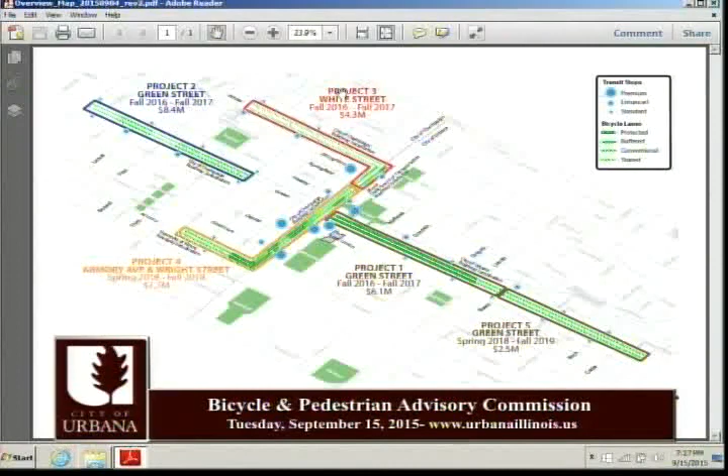And that's what Craig's doing. So the MCORE project, as you know, or if you don't know, is a really large project where we received this TIGER grant. Actually it was MTD that received it, in conjunction with the cities of Urbana, Champaign, and the University of Illinois. This is an overview of the project.

Basically the first 3 projects are going to be, actually project 1, which is in front of the Union, which is within the city of Urbana. Project 2 is over here, basically on Green near Neil, all the way up to, I think it's 6th. And then project 3, which is basically the White Street corridor up here. Projects 4 and 5, which is particularly in Urbana, is the eastern portion of the Green Street section, would actually go several years from now. So this thing's a staggered type project.

Next year, I mean they're looking at basically going out to bid in June of 2016, and this will be a very aggressive type project through the campus zone at that time, a multi-year project. You can see there's a lot of money, a lot of expenditures, and it is a good chance to get things right here and really overall improve transit operations, improve bicycle operations, and pedestrian operations through this zone. Keep in mind, we're within the university district, and in all reality, vehicles are last in the hierarchy.

So this is just the general overview, but I'm going to walk you through the exhibits, starting with Project 1, then we'll go to 2, 3, 4, and then we'll come to 5. Well, 1 and 5 are the ones that are within Urbana, but I wanted to give you a little bit of an overview of all of the projects.

So within Project 1, here, this is an exhibit that the consultants prepared. It's an overview of the highlights that are going to happen within this project. And I'll zoom in and we'll kind of walk the corridor. This is Wright Street, alma mater's over here on the corner. Over on the right side, this is Goodwin Avenue. Project 1 continues on to the east, just east of Lincoln, to Busey.

You can see within this zone, this will be a complete reconstruction of the pavement system. They'll be putting in dedicated bus stop lanes, those are what you see in red there. We'll zoom in a little bit on those.

Those lanes will likely be a colored concrete to stand out from the rest. There will be a reduction in the number of lanes through the section. Right now it's a 4-lane section with a median in the middle. It'll turn into basically one lane each direction with left turn lanes at select locations.

There'll be some highlighted things like boarding islands or refuge islands, and bike boxes, which we'll get into in a bit. There'll be a leading bicycle interval, which is basically an advanced signal time, at Goodwin and Green.

Right now at Wright and Green, they're investigating. They will have the leading bike interval, I'm told, and they're looking at the potentiality of bike boxes there. That intersection does have a pedestrian scramble, and they're going to keep it. When we go to Goodwin and Green, they're looking at bike boxes on all four approaches, a leading bike interval, and the pedestrian scramble, so they'll keep that there too.

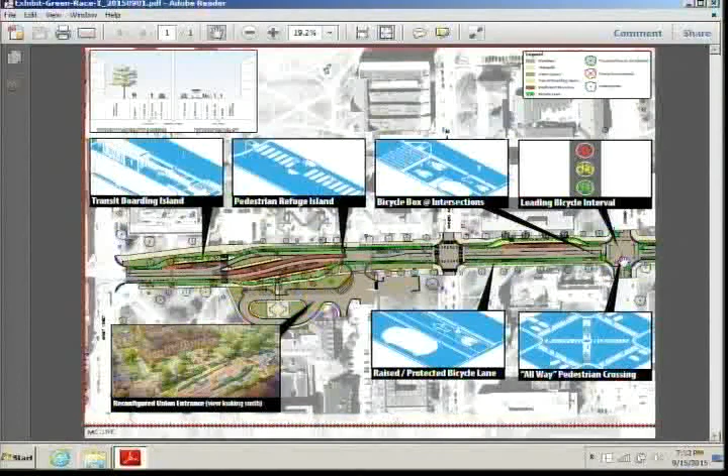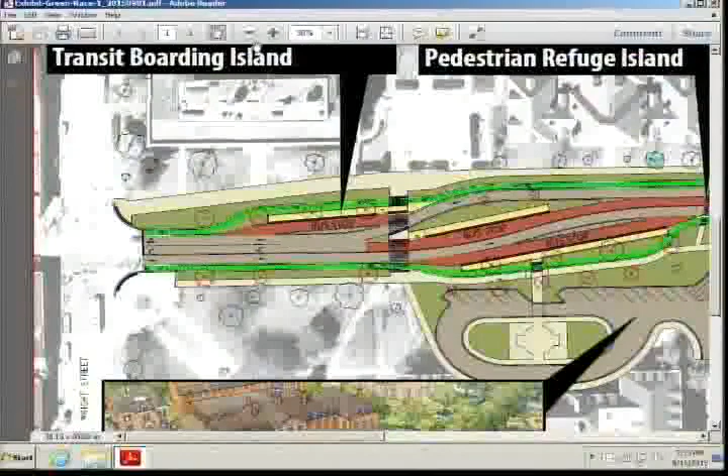But let's just zoom in, we'll go through a little bit more detail, that way we can walk through the PDF here, west to east, so you can see a little bit more. The red X's are trees that are basically being removed through the project to make improvements.

There will be a swale drainage system on the outside that we're looking at possibilities of bioswales for green infrastructure. We're not sure yet, cost-wise, if they'll be able to do that, or at least get the framework in for future beautification through there, and obviously green infrastructure.

I do know that Wright and Green, they're really looking at that heavily right now. There's still a lot out there. Wright and Green is not an Urbana intersection, it's actually Champaign's intersection to maintain. So our improvements actually start on the east leg here.

But as you see here, they've separated out the bus movements, and our city staff tell me this is really important for the operation of the transit system. So what you see here is, if a bus was going to go northbound, they would stay in that right lane, go over and unload and discharge and pick up passengers here. And if they're going to go southbound, they would come over to this lane and in, then head south. Currently what happens is they unload and load at this location, and then there's a big weave that occurs on this leg, which is really not a preferred movement to occur here.

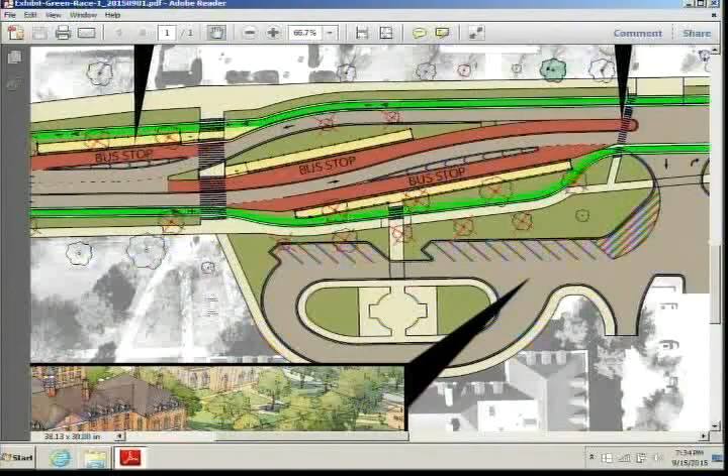I have some more zoomed in images of the Union. Basically, in the end, they're looking at closing the west leg of the Union and doing a loop drive that will enhance pedestrian crossing safety, going from the quad over to the engineering quad. I have a more detailed drawing we can zoom in on.

Walking it to the east, keep in mind this is within what they call a phase 1 study, so this is the concept study. Once this is approved, after the public meeting and input is taken and adjustments are made, the city signs off on it, then IDOT, the Illinois Department of Transportation, signs off, and then the Federal Highway Administration signs off. After that, they get heavy into the details of plan construction. They're already working on that simultaneously. Approval was given to do that, but I wanted to let you know this is really a fast track project.

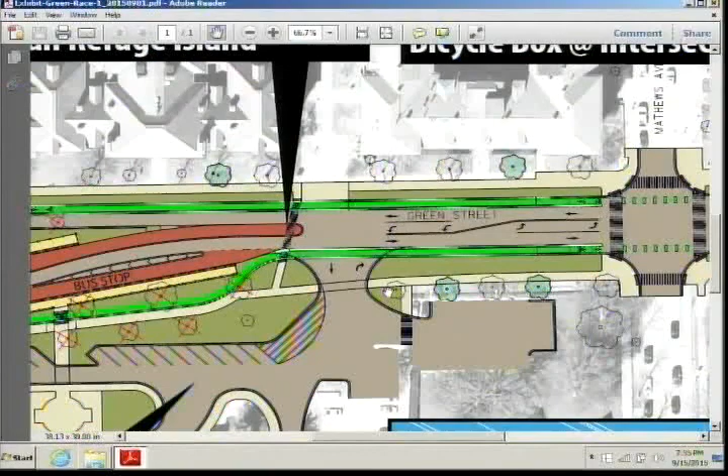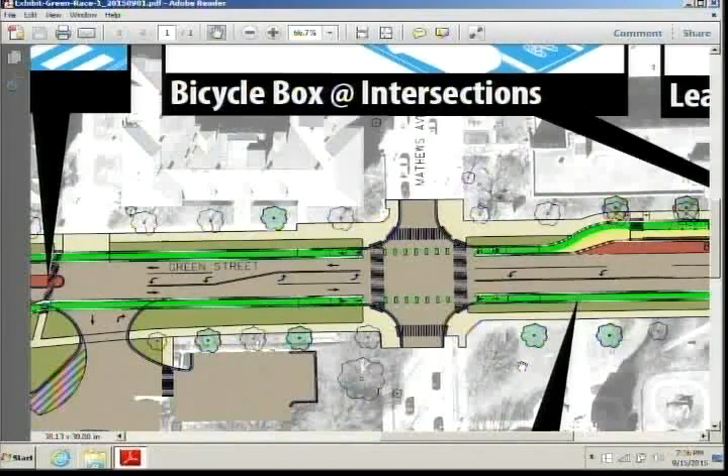As we go down here, this is Mathews. One of the things you'll see is the crosswalks, and they're showing a different type of improvement here with some different striping through here. That's unique to our area, and I think they're just wanting to differentiate where the bicycles are and where the pedestrians are.

There would be a bus stop in between Mathews and Goodwin on the north side. You're seeing that here. This is the bike boxes, which we'll get into a little bit further along.

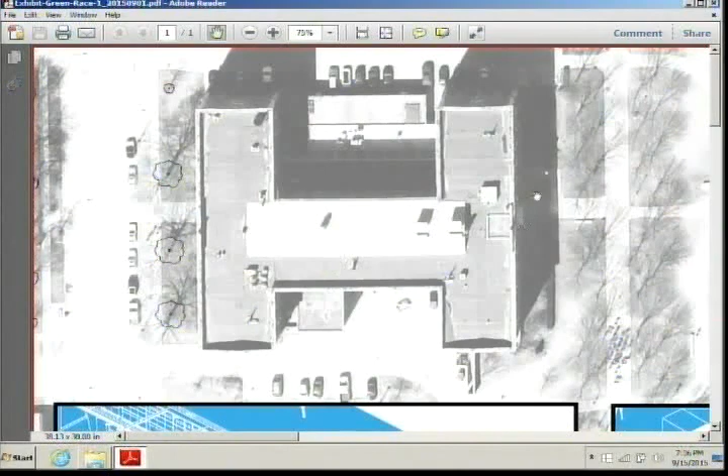I'm going to zoom out just real quick, and we're going to walk through each little thing here. Let's see if it pulls up. So this is a typical section.

Basically what you see here is the raised bike lane. There's a mountable curb, and the bike lane sits up higher than that. This planting strip is what I was talking about - it's actually a drainage strip, and then the sidewalk. What's important is the bikes are now being separated. That cycle track out there now will be eliminated, and the bikes are separated from the pedestrians.

On a side note, I went to school here. My wife followed me later when we moved back up here. I told her, you better be careful about what we called being schwinned. First day she got schwinned and got knocked down. I think the reason I'm letting you know that is it is dangerous when you have the mix of bicyclists and pedestrians in that same zone.

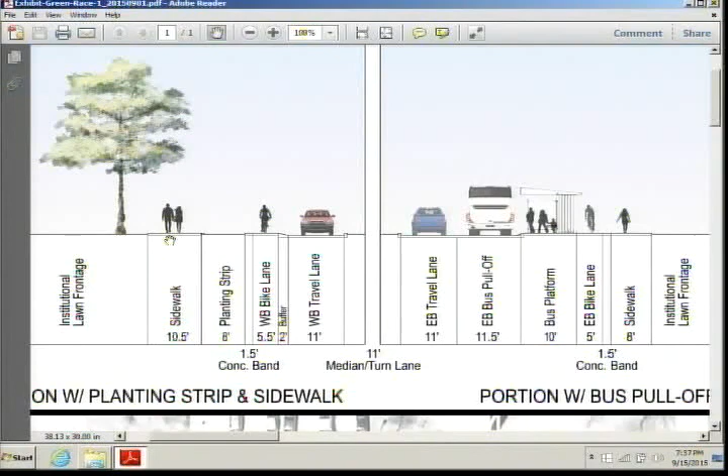That's what they're able to accomplish here, a separation of those two entities. The bike lane is shown at 5.5 feet, but there's actually a 1.5 foot concrete band, so that gives you a 7-foot bike lane in the end, the effective width I guess. And then they've got 11-foot travel lanes through here.

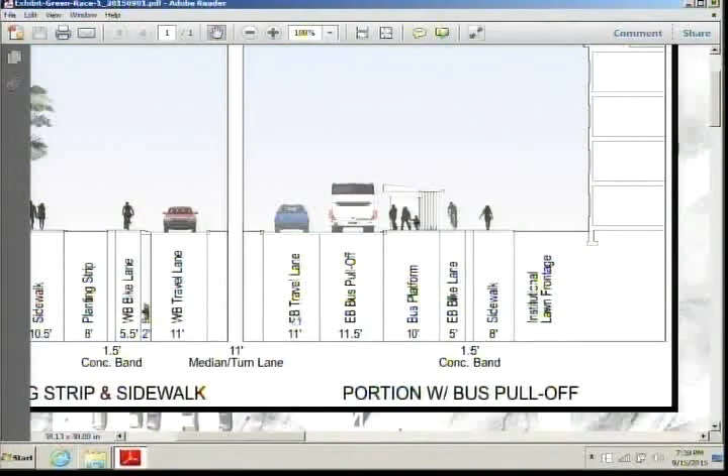Let me zoom out a little bit, and bear with me, I'm coming down with a cold. Barb's working me too hard.

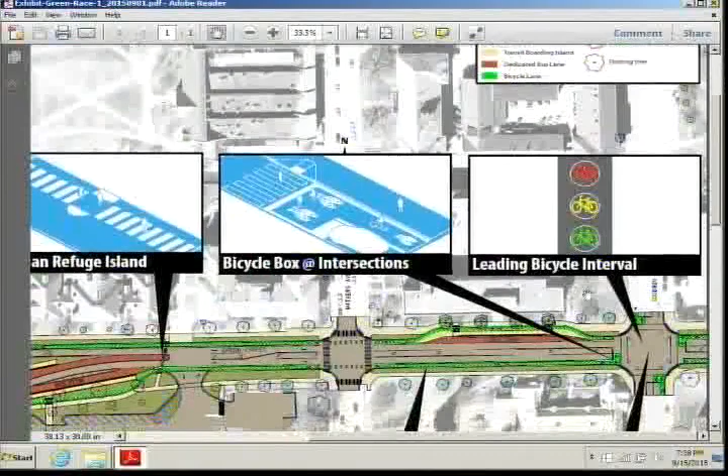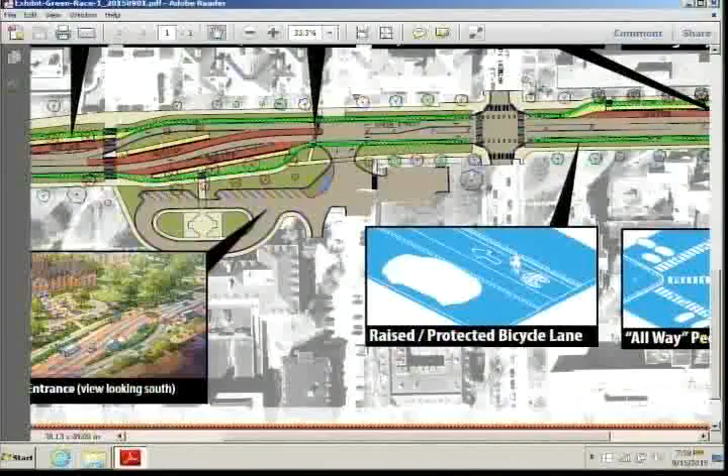So again, here's the bike boxes, and we'll get into that - I've got an interesting video I'll show you. This is the leading bicycle interval; I have something on that too, we'll get into that a little bit more. You've seen the pedestrian scramble and the protected bike lane, and I have a more detailed drawing of this we can zoom in on.

Does anybody have any questions with this zone from Wright to Goodwin? Any questions on this?

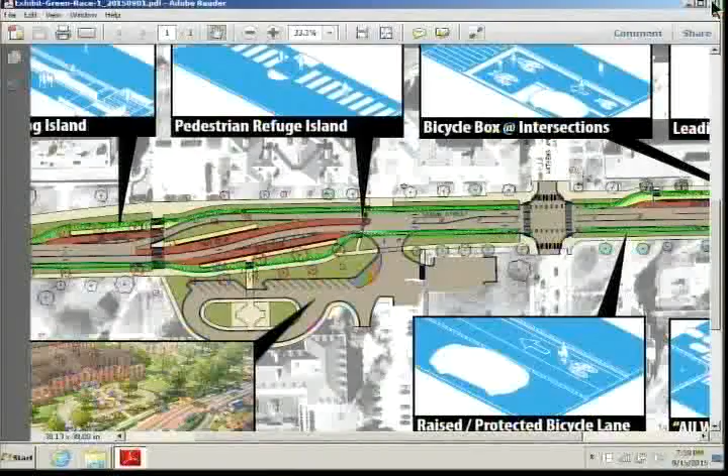Cynthia asked: are they going to have a proposed design for Wright and Green for this meeting, or are they still working on that? They're working to refine it as we speak. I'm anticipating they would have something. I expressed a good deal of concern about the design shown here, because I am quite convinced that cyclists would come off the raised bike lane and zip across 2 lanes into the left turn lane, which would be extremely hazardous. Yeah, there's talk of a 2-stage left turn here, or a bike box. In all honesty, I haven't seen the details on that.

As the person who worked on these grant applications, one of my primary motivations was to redesign Wright and Green so that bicyclists know where they should be and how they should behave. Right now they don't know whether to behave as a motor vehicle or a pedestrian, and you never know what they're going to do. That's very hazardous for all the vehicles, but buses in particular have a difficult time here because cyclist behavior is erratic.

I definitely want there to be clear definition for them, and that was why I spoke up initially when looking at this with MTD. So I did squawk about that. I didn't make any recommendations, but I did say I think it's very important that we not just bring them up to the intersection and say, okay, figure it out. Because the way it gets figured out here is people do all sorts of erratic things.

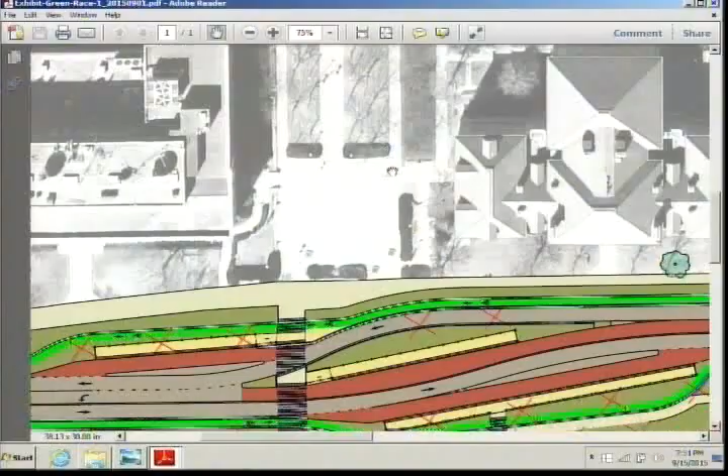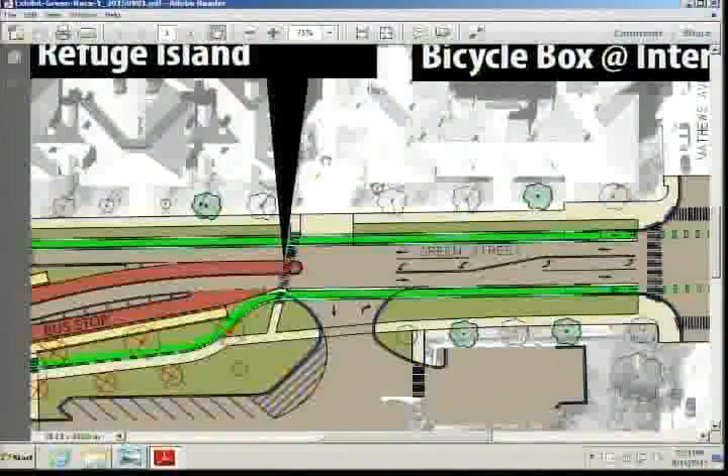So as we go east here, there's just the one entrance here, and then there's an entrance over here. And then there's the Mathews one on the north side too. Cars presumably go in and out of that, but I think this is more of a service drive than anything else. The good thing is with them eliminating this, there's no conflict here that used to be here on the west, because there was a drive here too.

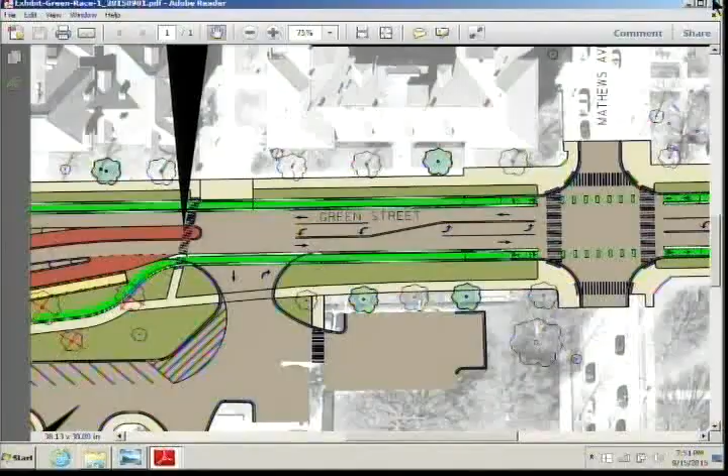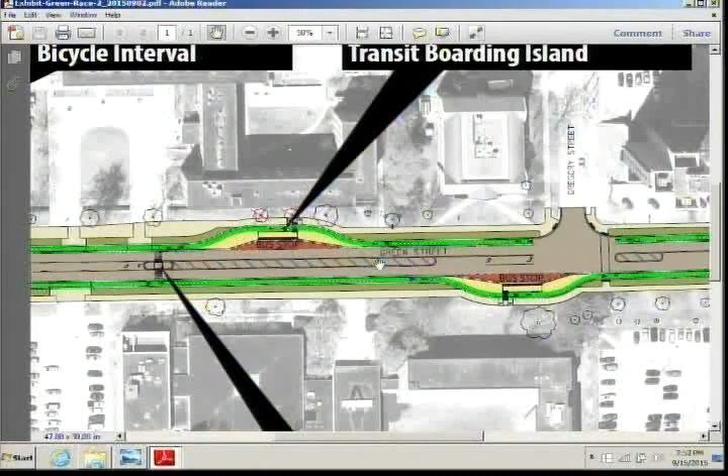So we pick back up at Goodwin Green. There would be a bus stop there just to the east, which there is not one there now. And we're still within the raised bike lanes. We see a bus stop over here and here near Gregory. We have talked about maybe this center median actually being, instead of painted, maybe some type of grassed raised median where there could be some type of plantings in there, which would help break up that visual space. Again, you see the bicycle lanes go around the bus stop.

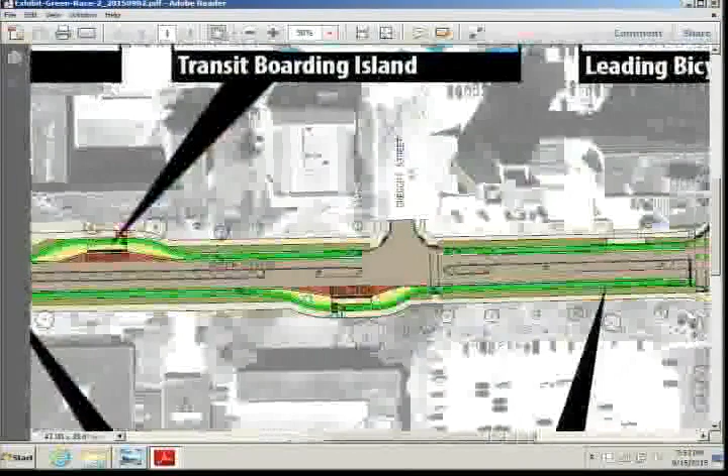And then as you get to the Lincoln intersection here, they're looking at a leading bike and leading pedestrian interval, both going concurrently, and we'll talk about that a little bit there. Could you explain that a little bit further? Not everyone may understand what that is.

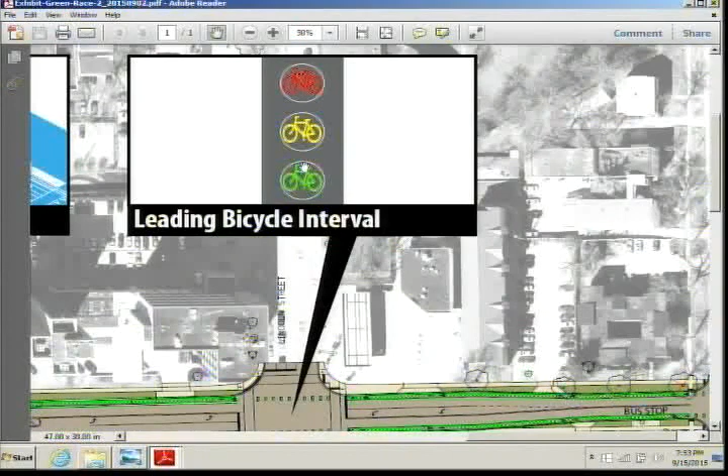So basically, you could say it's a head start interval, is what it is. It's a 3 to 5 second interval where the bicyclist would get this - there would be a special signal just to the right, and I've got a YouTube video that would give you a little bit better idea. But it would go in advance, so the bicyclists would get a head start on the vehicles, and also the pedestrians do that too. They call that, and you'll see in this video, sometimes a pedestrian head start interval - 3 to 5 seconds to get them out in advance of the cars, so they don't have to immediately compete with the cars. And one of the benefits of that is it increases your visibility, because you're already halfway out into the intersection, particularly for the pedestrians.

A lot of the right hooks are a result of the pedestrians starting at the same time as the cars, and the cars are not paying attention. My own daughter was hit at Vine in Illinois for that very reason. So it really can make a big difference in reducing those right hooks for pedestrians. And I haven't seen as much data on the leading bicycle interval, but I'm assuming that the increase in visibility will have similar benefits.

And this would be for the east-west movement, not for north-south. The primary movements here are east-west with the pedestrians and the bicycles. When we get east of Lincoln down to Busey, and Project 1 ends right at Busey, this would just be your traditional bike lanes. Keep in mind they're showing them green - that's just for visibility here. Our intent is not to paint them green at this location. If they do bike boxes, they will likely be green.

About that bus stop there at Busey and Green - is that a traditional one, not one of these enhanced bus stops? That's a traditional bus stop where the bus would pull into that rightmost lane to let passengers off, so they'd interact with the bicycle lane. There's just not physical space to create a bus pull-off without getting into the right of way.

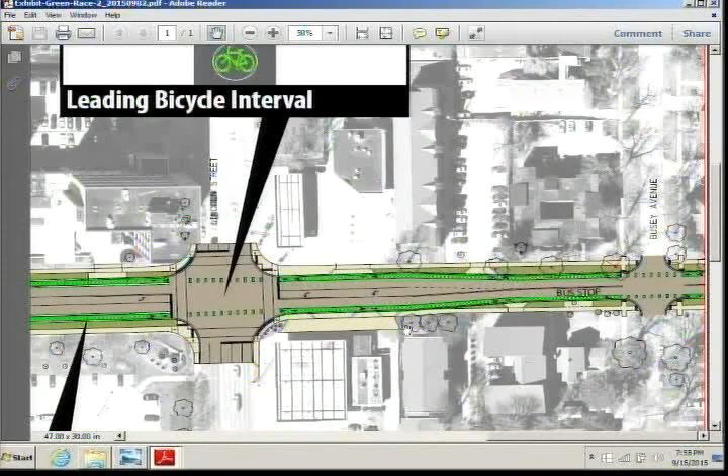And now we're into the residential area - the start of it. It was very important for Urbana to maintain the character of the corridor through that zone. We'll talk about that within Project 5.

Let me zoom out a little bit so you can see. We'll get into the bike boxes here, they call it LBI. Just looking through here, I think you've seen all of this. So any other questions? That is in essence Project 1.

One thing real quick - the unimproved bus stop that's going to cross the bike lane, is there anything special going to be done to reinforce the road there? We've talked about that - that section would be rebuilt in its entirety.

We are talking that the section between Goodwin and Lincoln would probably be rehabilitated, but the section east from Lincoln, at least Busey on down to Race, would be completely reconstructed. And when we do that, if we use an asphalt pavement, we would put in a concrete pad for the buses.

We've been doing that a lot around town, because there's been different spots, in particular Wright and Gregory - there's a pothole this big because of the buses. So I just wondered. Thank you. Any other questions about this segment before Craig moves us forward?

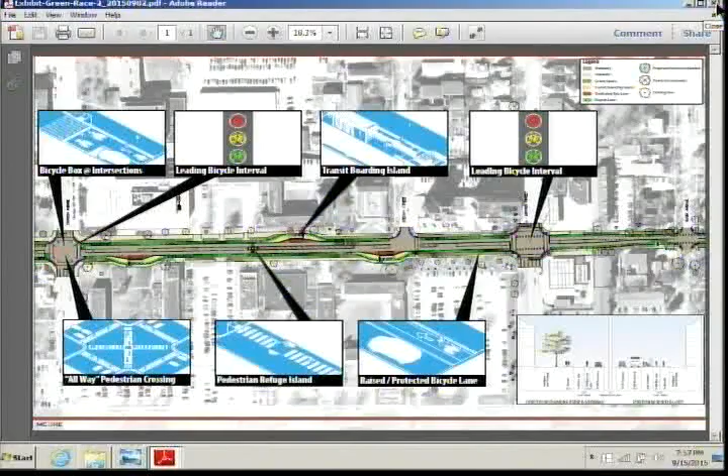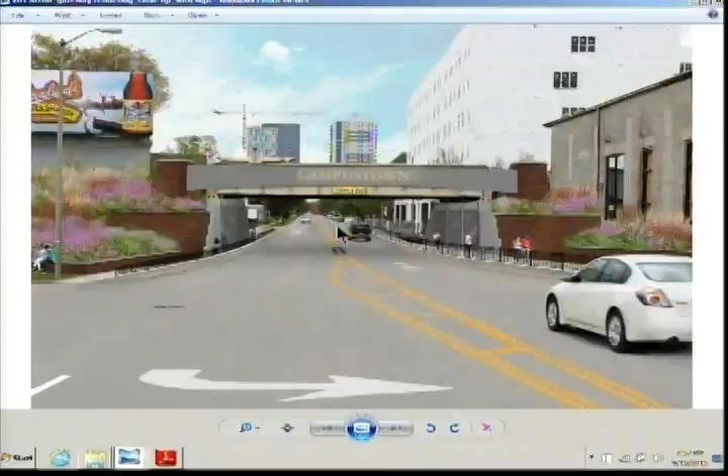So I just want to show you the projects in Champaign and the other section of the U of I, just so you get a handle on this. I haven't spent much time on this myself. This would be the entrance off of Neil - I'll be discovering it a little bit with you since I just downloaded this stuff. This would be the gateway entrance right there at Neil, kind of a concept drawing, so some type of beautification there.

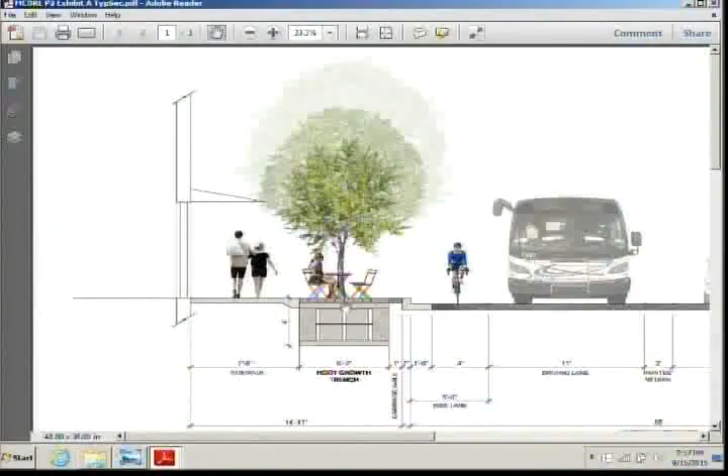Just zooming in here, it looks like they'll have some streetscaping, a sidewalk. This is really a corridor that I'm understanding from Champaign they're looking at redevelopment wanting to occur, which is really what happened from Wright Street to the west when they redid all of that. The whole landscape's changed since I went to school there.

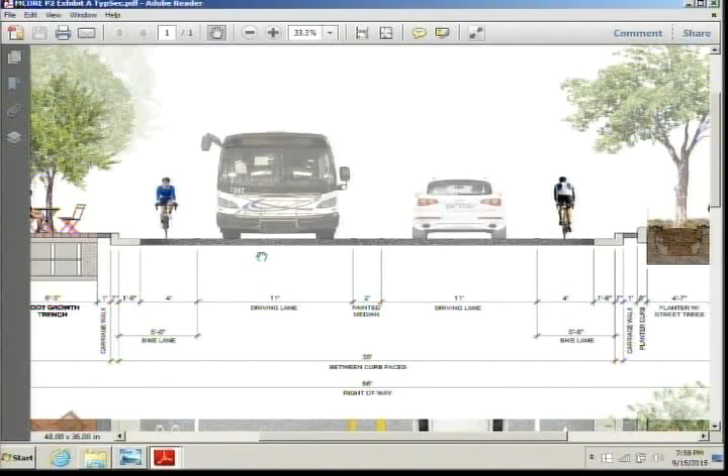So this would be a complete reconstruction, with a 4-foot bike lane counting, and if you count the gutter pan, that would be a 5.5-foot bike lane with an 11-foot driving lane, which when you have buses, that's about where you want to be. You could get down to 10.5, which we do on East Green. Then they've got a painted median it looks like, no plan view rendering, but that's kind of Project 2.

This project was set to go regardless of receiving the TIGER grant, it just fit in nicely and they were able to get that taken care of. Since this one's Champaign jurisdiction, if people have comments on it they can come to that event later this week - this will be fair game to really talk to the Champaign folks about.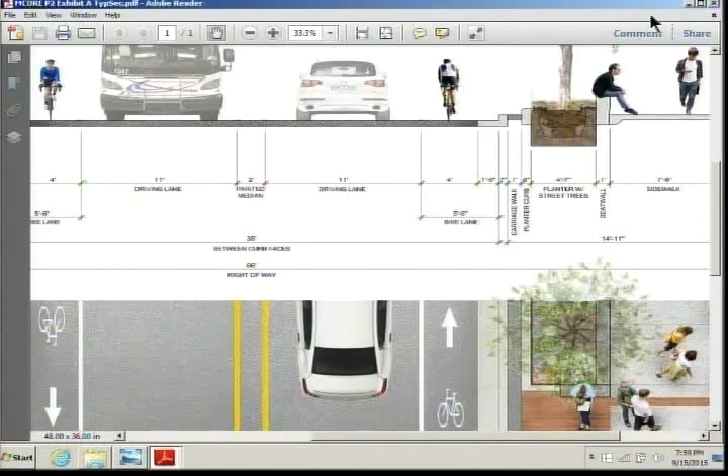So any other questions on this one, or do you want me to zoom out or look at anything? I know wider bike lanes are often appreciated by the bike community - if we can get them to 6 feet or whatever, that'd be great. This section's pavement is in really bad shape too. Any questions about segment 2 here?

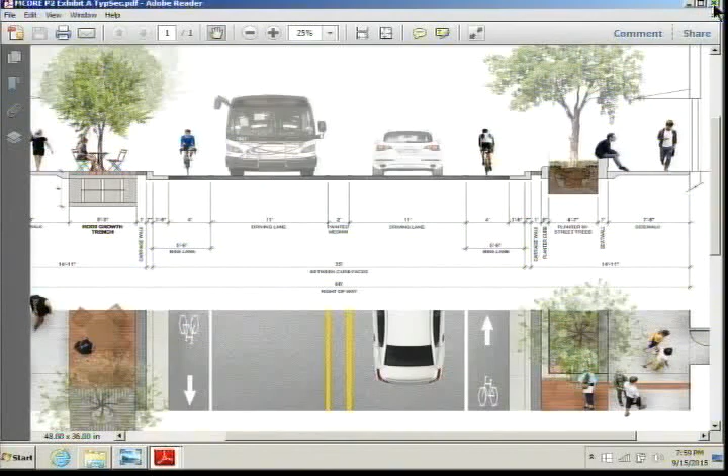So this is Project 3. Let's see here what we got. Some of these are large files, we'll have to wait a second.

So this project 2 and 3 would be done, started next year. Let's see if I can open it up.

So this would start on White Street, which is really where they redid the boneyard here. Let's let it catch up a little bit. So it looks like they're actually doing shared, I guess they call it. This must be a pretty big file.

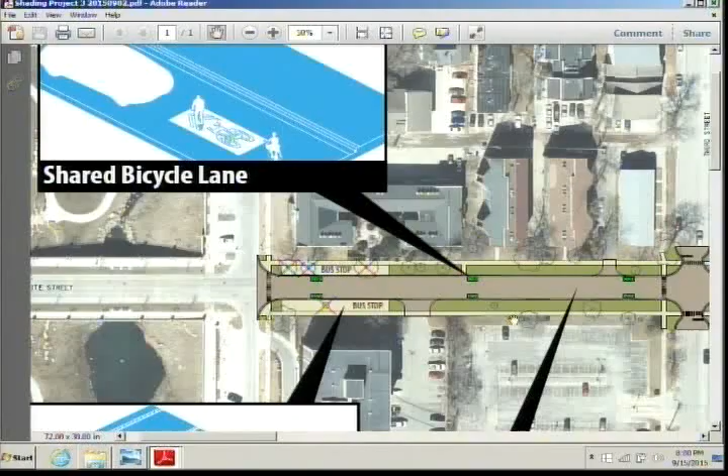I can tell you the reason the road was not expanded here was because they would have had to take out an enormous number of trees to widen the roadway for a bike lane. The traffic volumes are pretty low, so it was felt that sharing the road is acceptable, although a number of cyclists have told me they don't like riding with all those buses. But that's a choice people can make - it's all a balancing act, and the number of trees was really, really large.

For me, it's the condition of the pavement because of the buses. That's the huge problem, not the buses themselves. It's a brick road.

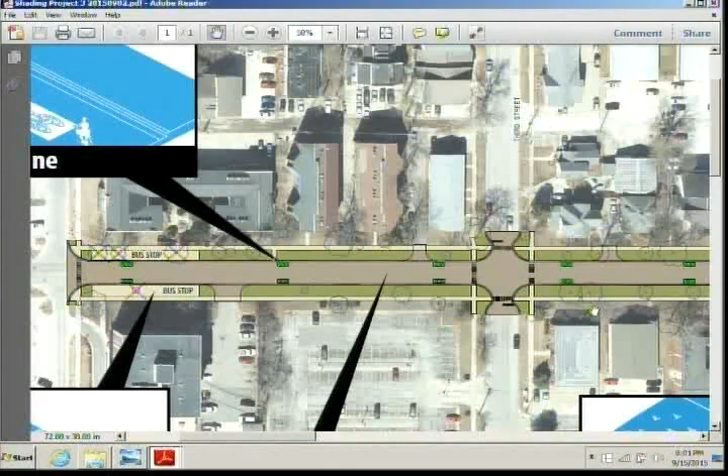So it looks like at the intersections they're doing bump outs, which would shorten the distance for pedestrians to cross safely. Here they do have some space with a parkway, which we don't have on Project 5 - not enough room to do some of that. It looks like they're doing some bus stops here. Looks like some type of transit loading platform with a kiosk. So maybe it's more like they stop in the road and then they have a platform - this may not be a pull off, but just a platform. That's my interpretation. High visibility crosswalks.

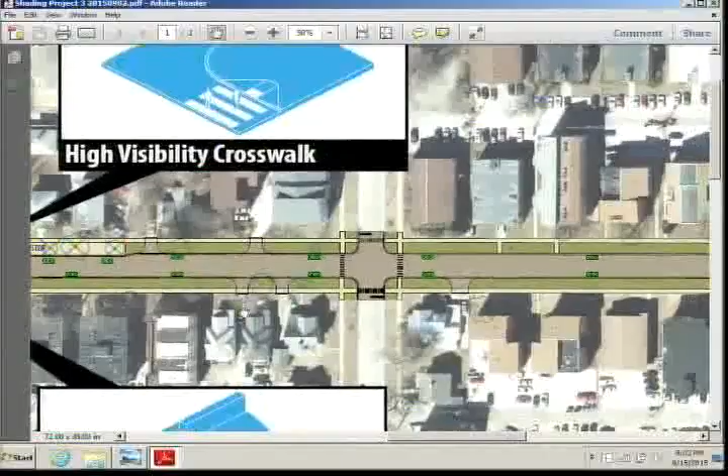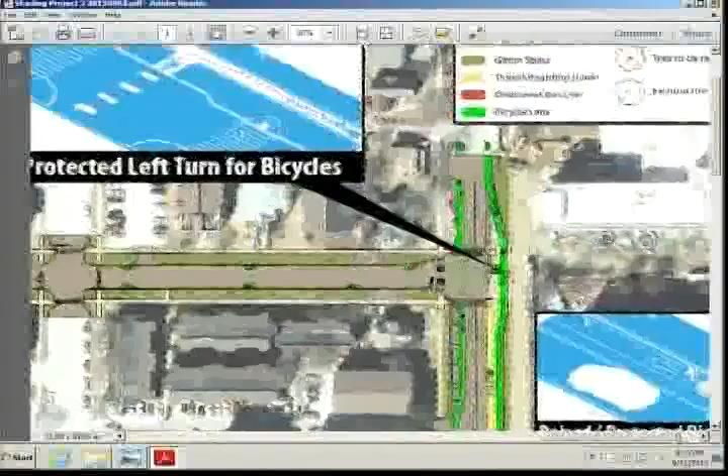Tell me to slow down if I'm going too quick. There's a protected left turn for bicyclists down here. I know this was a challenge. This is a unique design here - you've got the bicycle lane northbound going behind the bus stop. If they want to go west, they have to do this protected left turn, it looks like.

And then is there, pardon me? Do you see it there? The 6th, isn't it? Yeah. No, this would be right - oh, okay. Yes, right, that's right, Wright and White, right, where we get in. Yeah, right now it's very squirrely.

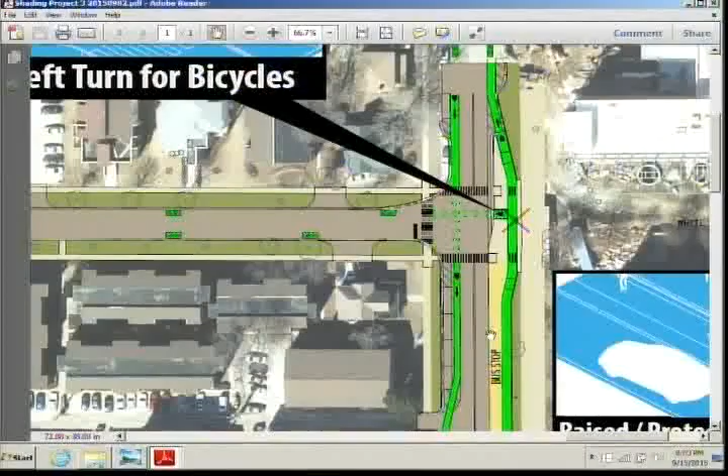One thing to note too, if you're an experienced bicyclist, you can always go over here to the left and stay in this lane, and then make that left if you wanted to do that. Again, they're trying to design for that casual adult bicyclist.

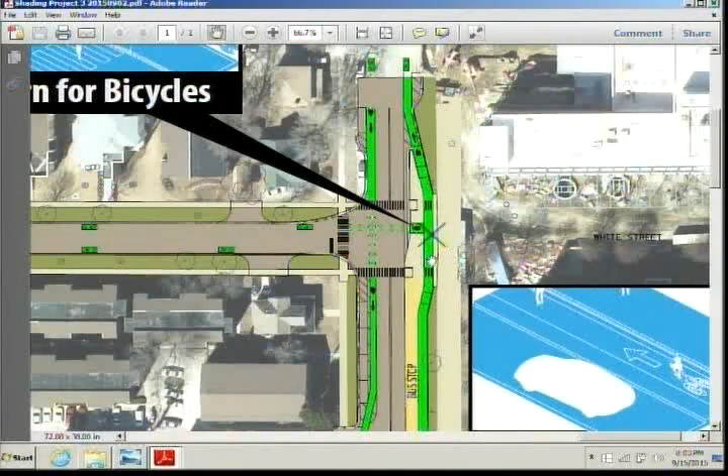Is there anything specific you think will be confusing? I had trouble getting here on time tonight because I had to navigate through the mess there. And what are they doing with the fountain there? I just have this funny feeling that when they get done, it'll be even more of a weird amalgam of pedestrian and bicycle and construction and visibility.

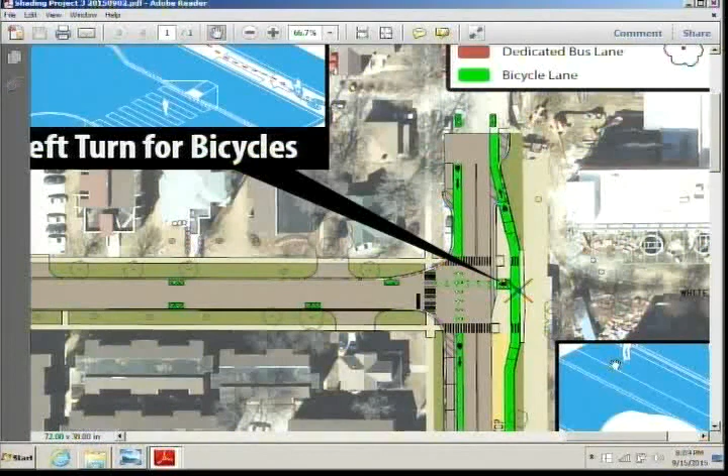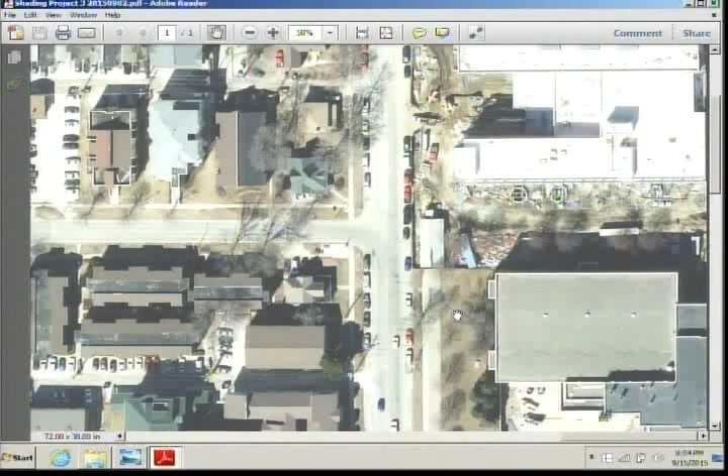This project unfortunately doesn't have jurisdiction over that, but you can ask about it at the meeting. So it sounds like things people can come to the meeting and ask about are whether that shared lane approach works, and whether it'll be marked as sharrows - there weren't even quite sharrows in the picture. They were going to put sharrows in, is my understanding, and they just don't show them here.

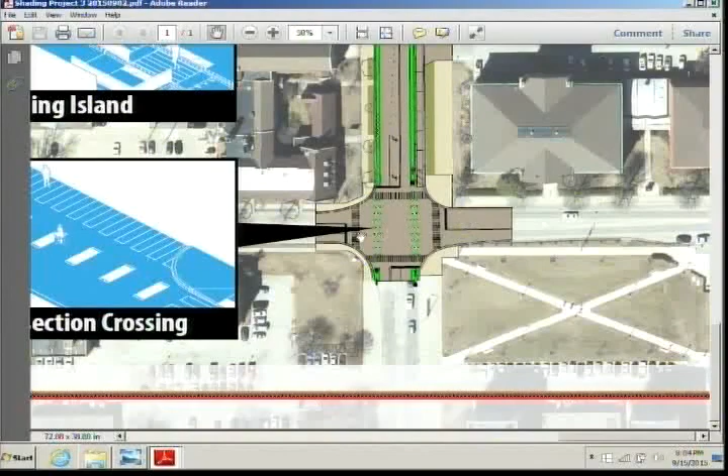So as we go to the south, now we're going down towards Green Street and the Alma Mater. So this is kind of, well, this would be Springfield right here at this point. What's your thoughts on

this bicycle intersection crossing? How do people feel about that concept of the bike lanes being marked, the bike lane route being marked through the intersection parallel to but separate from the pedestrian crosswalk?

I'll say I like it, because that was a comment I made to the planning department when they asked for our comments. I like seeing that they kept that comment in mind. I'm not sure if this would be the best way to do it, but who knows what would be the best way. My experience is from bicycling in other communities that have this - it is helpful. It helps alert the motorists that they are to be looking and where to be looking for the cyclists going through an intersection. I feel like they pay more attention when it is done that way. That has been my experience. Now, that's just anecdotal, but I think there is some evidence that it's helpful. I don't know how much research has been done on that.

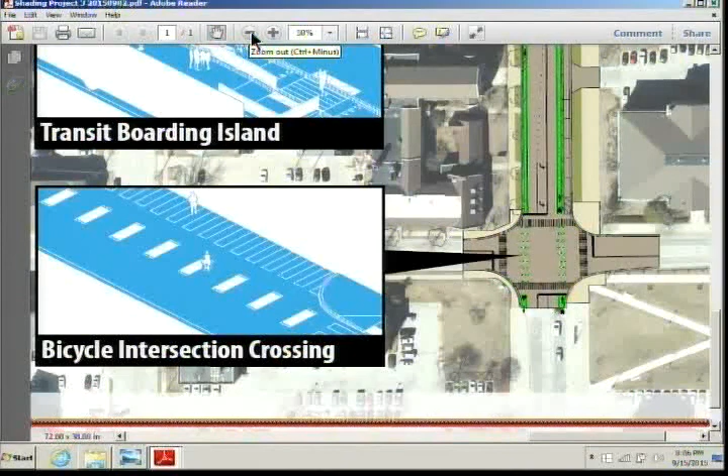I also want to say on White there will be lighting put in, so it'll really improve the lighting, and I think that'll make a big difference in safety. Everybody knows the condition of the road is a safety issue, but I think that'll be nice too.

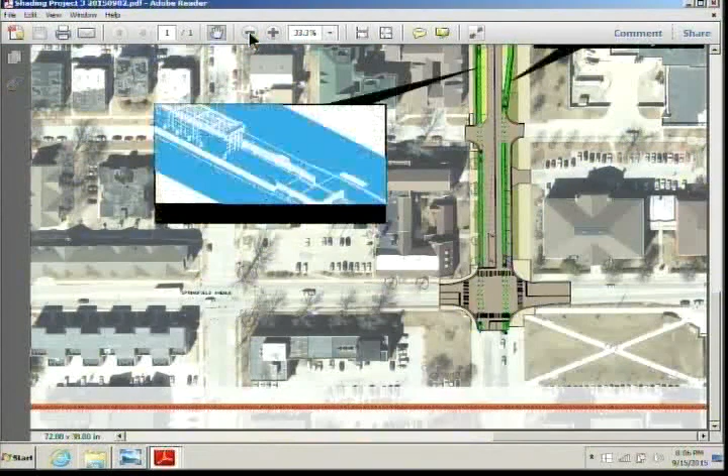So any other questions on Project 3? Are we good? Yep.

Do we need to see the cross-section, or are we good? I think we're okay. There's a theory that we just wear you down and then you just say yes. That does happen, yeah. I'm getting a cold, so I'm getting tired myself.

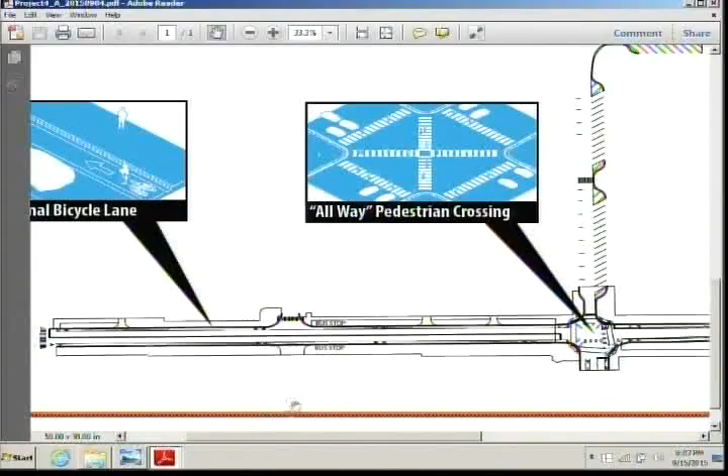So this one, at the time that I pulled this from their site, wasn't all prettied up at this point, but it looked like, so this is Armory down here, and the grad library would be back over in here. No, actually Armory would be over in here, and so it looks like bike lanes, standard bike lanes coming up. Is this 6th? I think this is 6th. Yeah, here. There is some revamp of the parking around here.

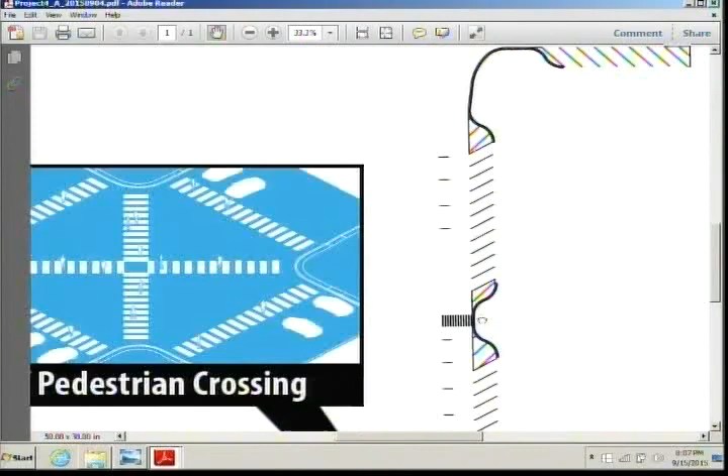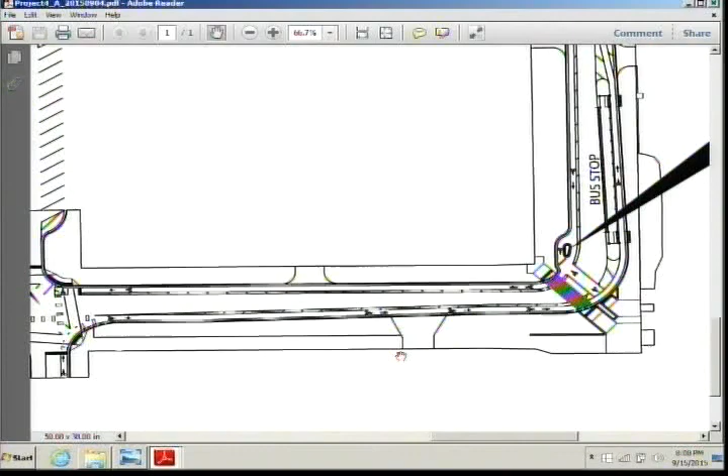So as we zoom in, right in Armory was, I know, a lot of discussion there. So you can see, bike lanes east and west, and this one was actually, I think some of the people were still involved in this. The bicycle community had a meeting, a lot of people came. I know there were some people here on the commission that were there, and I think the result here, this was a challenging intersection, and there was some talk about removing the bike lanes completely, and I think there was eventually a compromise, and so you do see the bike lanes that continue on through.

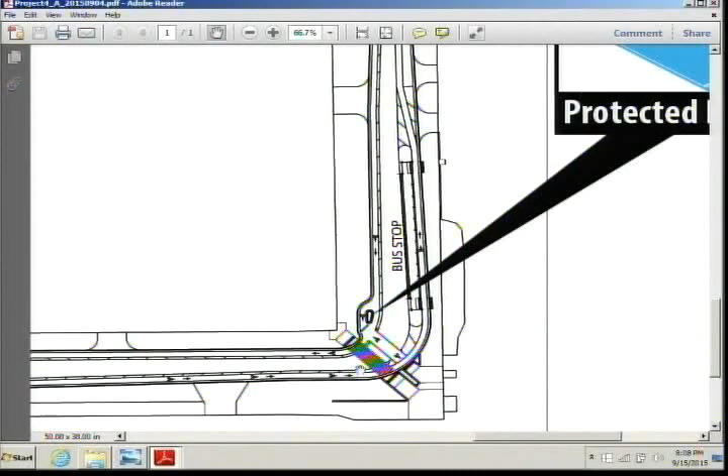Then the bus movement would actually be one-way northbound, and there'd be a loading zone here on that northeast corner. So the grad library's over in here. There's a lot of stuff going on here, a lot of pedestrians, and so crossing the bus zone, it would not stop on the south, right there. Right now, they stop right in here. Now they'll turn the corner and come over in here, or on this side.

And that's a huge platform, improvement. I ride that every day, and it is a disaster. It's horrible, it's scary. Looks like they're doing some type of, it's almost like a jug handle here, so that they don't just zip across there.

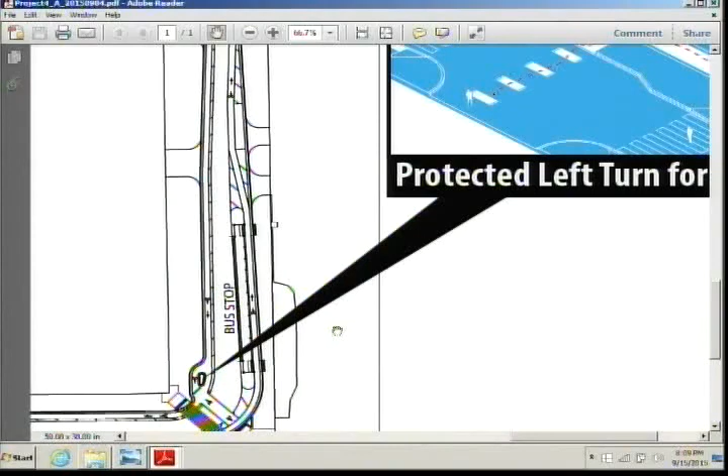It looks like the transit district is the one that had to compromise, because one of the goals was to get back to having two-way bus traffic here for a variety of reasons. We're in such constricted space because of the buildings and the historic nature of the library that there just wasn't space to do everything, and putting in the priority for pedestrian safety, this location being the first priority, there was eventually this compromise arrived at, and it is going to be a huge improvement for the pedestrian and bicyclist users in this location.

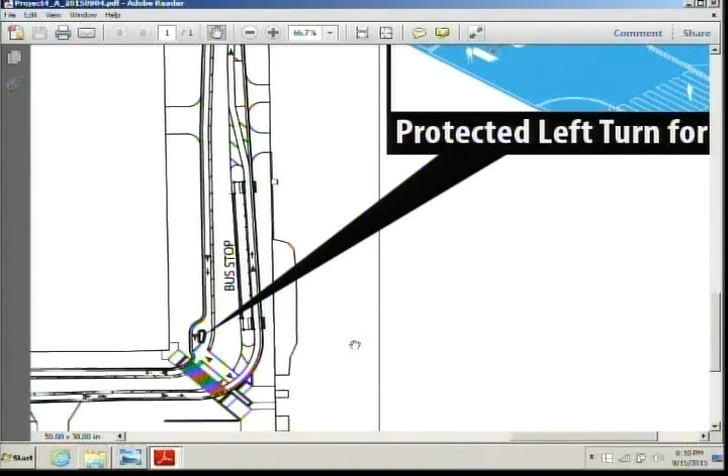Yeah, I think we should all thank the MTD, and also the bicycle community, because without that voice, it's easy for people not to understand, and I think that's the struggle we're going through with this bike box issue right now, too. So as we head north here, you can see that they'll still maintain that bus-only lane, where then cars would still go to the west.

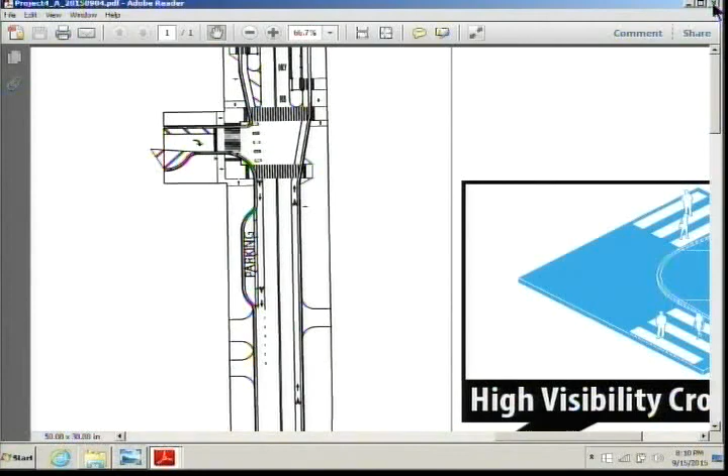Any other questions here on this section? No? All right, so let's see. So this would be the next section of that.

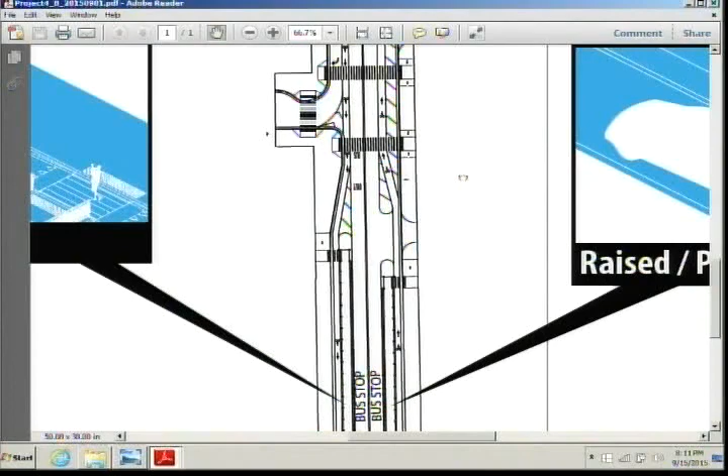So now we're really into a bus-only zone through here, so no cars at all. And the bike lanes basically are routed behind those bus platforms, with fencing and marked crosswalks, so that you don't get someone stepping off the bus, or the bicyclists have people stepping in front of you without any warning.

So you see here, cars would come down, and this would be a case in point where they are able to get the space in to make that right turn lane, and then have the bicycles go through.

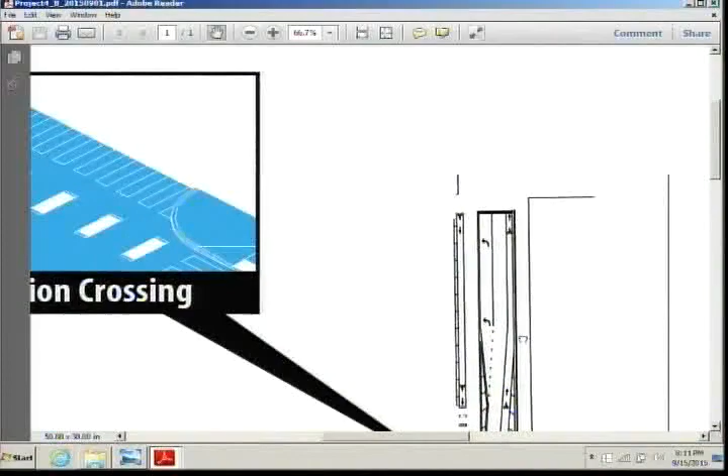Wow, that's a big change, but it seems like much improved from the horrible sort of substandard two-way cycle track, whatever you call it, that's there now. Years of debate, and this is a big improvement. Any other questions here about this segment?

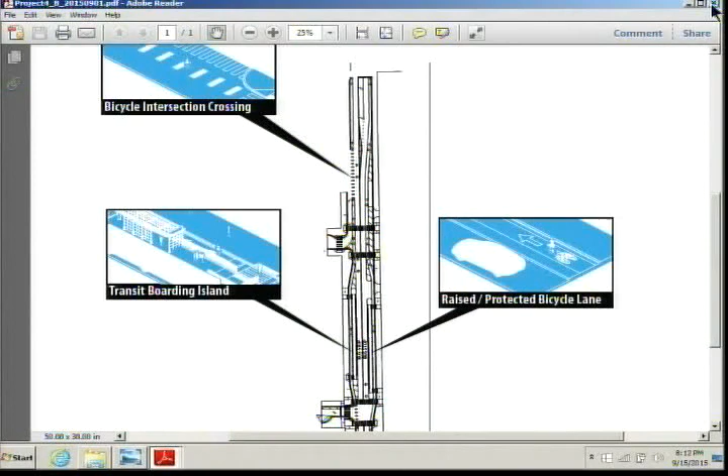Okay, let's go to project 5. So now we're back to Urbana. This would be 2018 construction starting at Busey and heading east to Race. This is probably the most straightforward project of them all. The curb and gutter limits do not change, so the road does not get wider.

But there would be parking that we're going to seek to have removed along the north side of the road, all the way through the project. I think I spoke about that last time.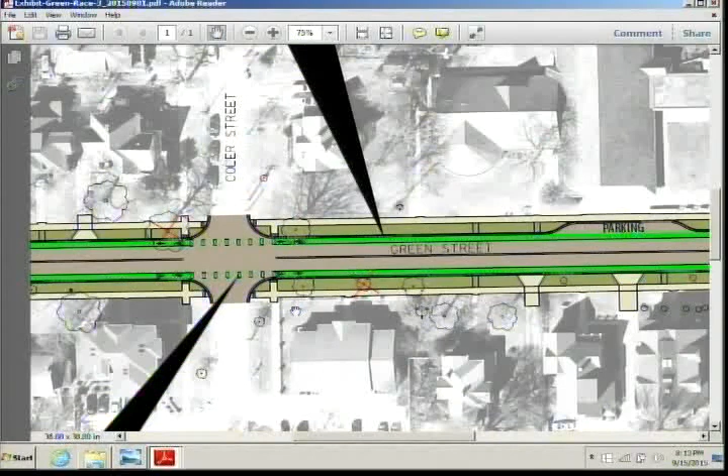We're actually investigating, one of the things we're going to look at is some trees. There's a lot of trees, I've walked it with the arborist, but there are declining trees. There's a few ash trees that are going to come out. But there are some specimen trees that are really nice, and we may approach property owners to seek permanent easements to run the sidewalk around and onto their property to save the trees if we can.

I think it's important to maintain that look and feel along this residential corridor. This is the Presbyterian church. There would be a pull off here that we're looking at because they had some concerns about the loss of loading and unloading, particularly for their senior parishioners.

Same thing down to the east at the Unitarian Church. So you do see bus stops, like I know this is a heavy bus stop here at Orchard. There's quite a bit of use. So again, the bus would pull off into the bike lane, but there would be a pad.

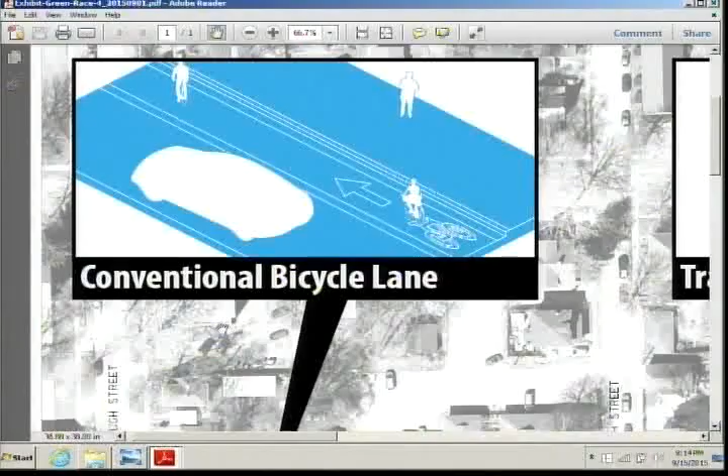And then McCullough's there, I'm going to go ahead and start from McCullough over. This road, we had anticipated reconstructing in the 5-year plan, but with the MCORE project we were able to move it up forward. And the pavement is not in good shape through here.

So as you see, it's really fairly straightforward. Here's the Unitarian Church with a pull off in there. Now we're getting closer to downtown Urbana.

With the library being over on this corner, there would still be a raised median here. This is a case in point where they'd be using a design similar to our other designs in town, where we'd have a shared right turn lane at this location due to the lack of space.

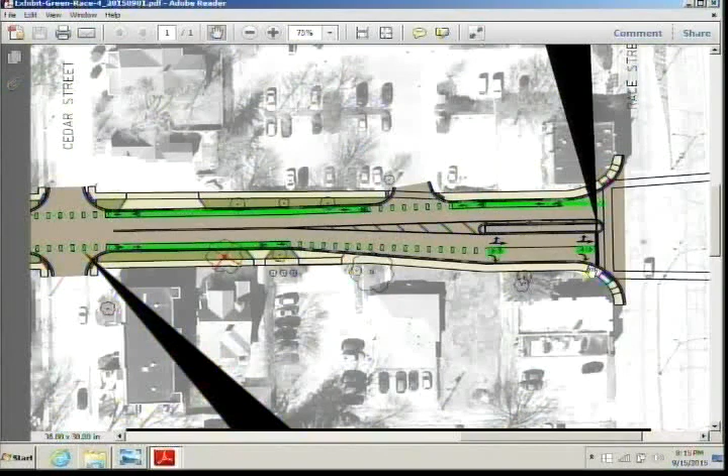Just a little question about the green sharrow right near your cursor - this one? Yeah, do many bikes ever go straight there? Because all you get if you follow the green sharrows and go straight through... it could be in the through-left.

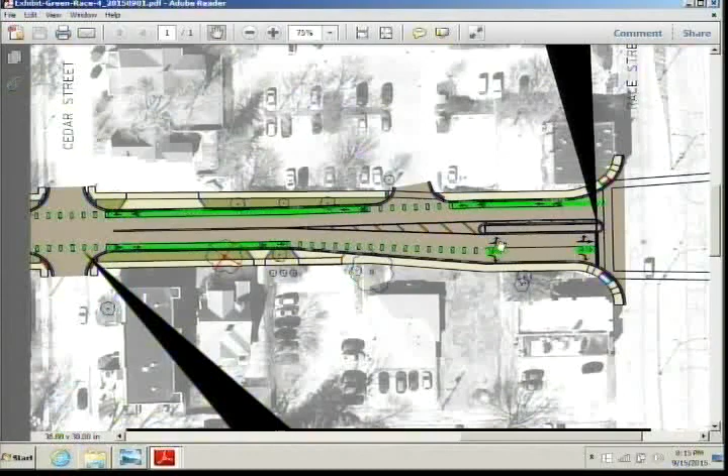I would agree, I'd say this is more of a heavier movement. And then since we've installed bike lanes on Race, I see them more up and down, and then occasionally turning left to go into here to the library. I think most cyclists would either be turning left or right.

So do you think that's the consensus of the group? Well, I more think so, it probably depends on the day. I think people going to the market on Saturdays may go straight and zip through the little segment between the parking lot at the Methodist Church, because there's so much traffic turning in for people who don't figure out they can park across the street on Illinois instead of cruising around in that lot by the church. So if you want to avoid that traffic, you can go straight and then turn right right before the entrance and zip through that area to stay out of some of the traffic. So I think it depends on the day and the time.

Okay, I think generally people are probably going left and right more often, but we have a lot of bike traffic on Saturdays for the market. So Charlie just mentioned maybe both lanes, perhaps - I'll discuss that with them.

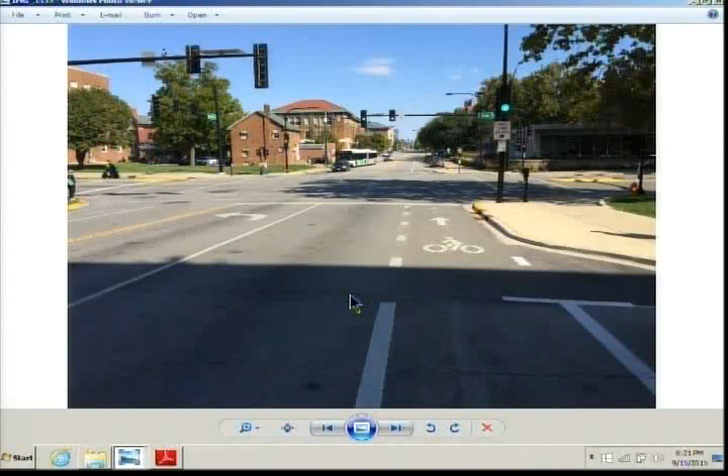So some of the conversation about what's been happening with the buses may be a result of the design - they're not supposed to merge until the dashed lines, what you see here, you can barely see it. This is the edge of the project, that's why we didn't change it. But didn't this continue as a city street? It is, but this was federal highway money, and we can't go beyond that - but we could still take that parking spot out. There's a lot of funny rules, but anyway, you're right.

We can take a look at this bicyclist... yes, I think that's the problem, going through. Yeah, that's a great picture. So let's look at these videos.

This is a bike box video that I just found tonight. I thought it was kind of interesting. Let's see if we can expand it.

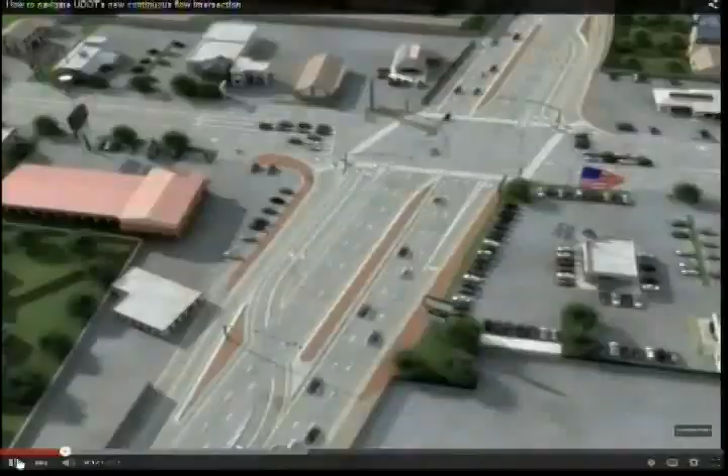Oh, okay, yeah, here's a different one. Well, so the question was, would people know how to use the bike box? Is it an educational question? That's what I was saying. Let me go back in here.

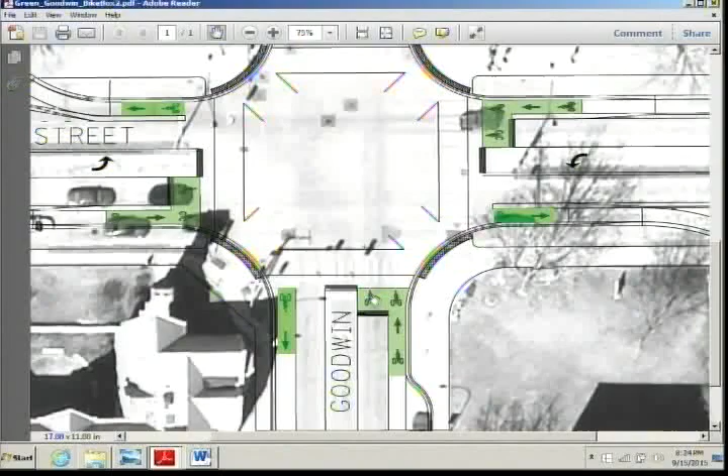So this is actually the design that they're proposing, a little different than that video. The bike box is only in front of the bike lane and the through lane, not the left turn lane. The reason is there's heavy bus movement through here, and these are actually fairly tight corners, so they felt it wasn't really best to have bicyclists at that location. So if a bicyclist is going to turn left, they would actually be in the lane at that location.

I agree. We've looked at the stale green issue, and look, in the end, I'm not here to defend this, I'm just giving you information, but it's about the pros and cons of getting the bicyclist out in front of the cars with the leading bike interval, and having the designated space. They just felt that with the casual adult bicyclist, it wasn't really good to mingle the two together in a standard lane.

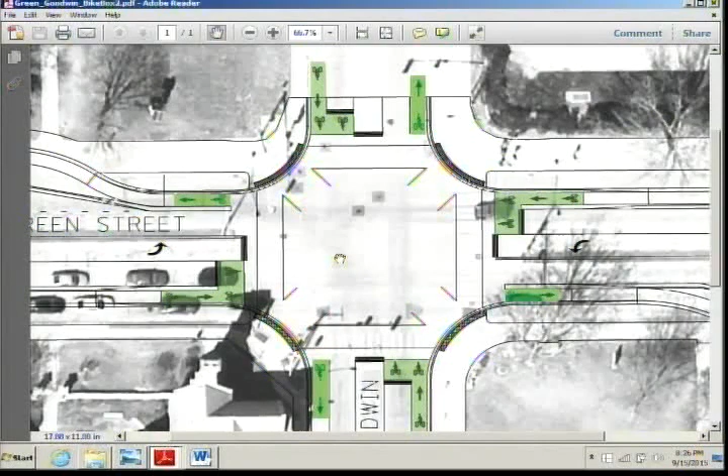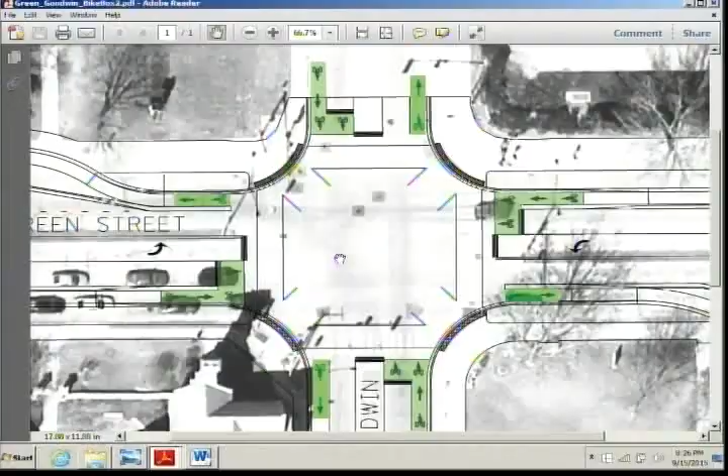But I do think if you have any concerns, it's a good time to go to the meeting and express that. Yeah, and these would be the first bike boxes in Champaign-Urbana, if this is what the community ultimately decides to do. I see them a lot in other towns, though I don't ride on them much myself since I'm usually without a bike when traveling, but in communities with more of them, the education factor might already be out there in the bike community.

Here it would be really new, so if we're going to do it, it would be incumbent upon all of us in the community to make sure we're educating people about it. But let's have that debate about whether this treatment makes sense and will be safer. Any questions about it, Sue?

So would there be a leading bike green light there? Yes, which would mean that the bikes would be starting sooner than the cars.

You wouldn't start simultaneous. I think it takes care of the issues at the beginning. The concern is after.

After the cars have cleared, the bikes have cleared, and then now you have the stale green, they call it. Do you want that to show us the concern? The leading bike interval video, I think that might be. Let's see, that one might illustrate this light timing.

So you can see, if you started on green in Victoria, you would get the right turn bike signal on green. You'll see that coming up here in the next cycle.

We've installed a Q-jump bike signal here. That'll come up in about 6 seconds. It's yellow for Victoria, the side street. The green comes up, the walk comes up, in advance of the green and walk for Broadway.

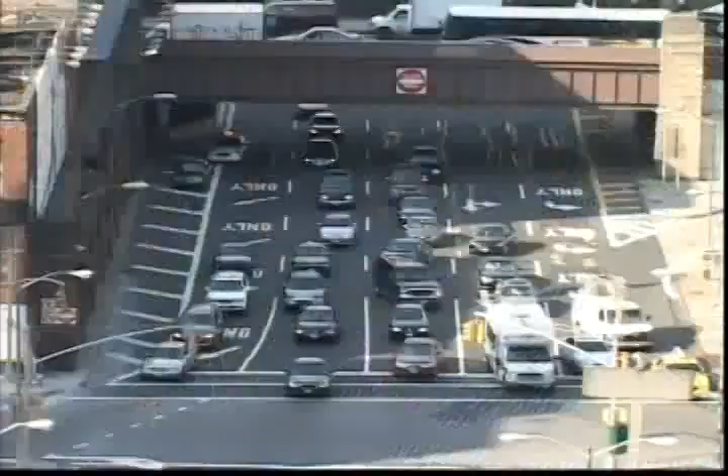Now you notice the traffic is completely stopped as the walk sign goes on. The pedestrians start first while traffic stays still, like this lady crossing here, and they won't move for a whole 17 seconds, giving people enough time to cross exclusively without worrying about turning traffic, especially coming off in a neighborhood like this from the Lincoln Tunnel, where we get volumes of trucks and buses. The cars and trucks coming out of the Lincoln Tunnel would actually conflict with us and not even stop when we would cross.

So it took a petition that was circulated across the different buildings at this intersection, asking the DOT to come and fix this problem.

We've had problems crossing 34th Street ever since I can remember. Having the lights changing has been great. Now you see the traffic waiting for you to cross, and we cross with much more confidence and much more peace of mind.

What I call an LPI is a life-preserving interval, a period of time given to you to save your life. It's a space where you can walk, like your guardian angel protecting you. We think these should be standard at any major intersection with a lot of turning vehicles, especially wide ones with high pedestrian volume. They're cheap to put in place at signalized intersections, it's just a matter of retiming. So it's an easy, cheap solution to making intersections safer for pedestrians.

I also, in French, call that 'le petit interlude,' the little space of time that doesn't belong to anyone except to you. That's funny.

So that would be what's installed with the leading pedestrian or bicycle interval at Goodwin and Green, probably still 3 to 5 seconds, not the 17-second one they were talking about. What's neat is this could be the start of installation elsewhere. I'm not guaranteeing it, but these things come to town. So really, that's all I had on MCOR today.